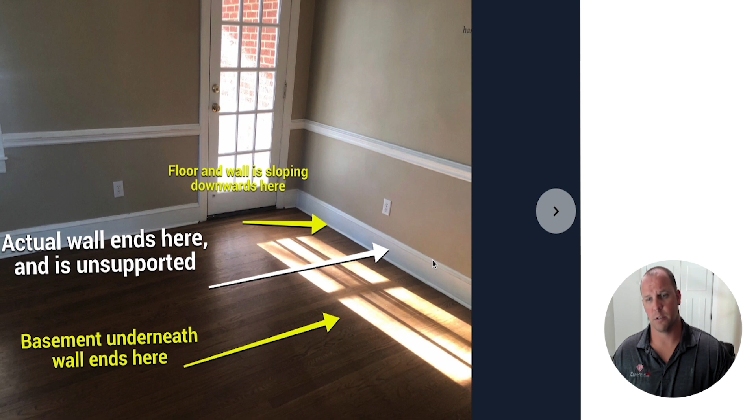So just going to walk through some of these photos so y'all can see it. Our system designer made some notations. Floor and wall is sloping downwards here. The actual wall ends here and is unsupported. The basement wall has maybe a 2-foot gap from where it ends underneath, which would explain a lot of that unsupported area.

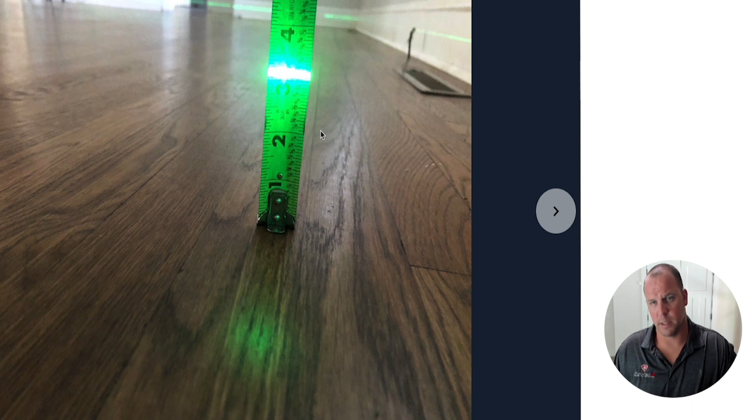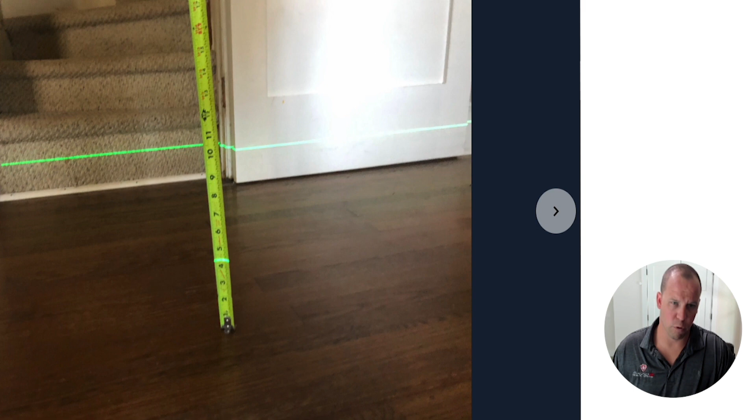You can actually see it in this picture, kind of hard to tell, but with that reflection you can see it a little bit. Here our system designer is setting up his laser. You can see roughly 2 to 3 inches there, or taking a picture, just about 3 1/4 inches. Throughout the room, here we're at about 4 1/2, 4 1/2 again, about 5 1/4, 5 1/2, 4 1/4. So we utilize lasers to tell what the floor is doing. Wow, that's almost 6 inches.

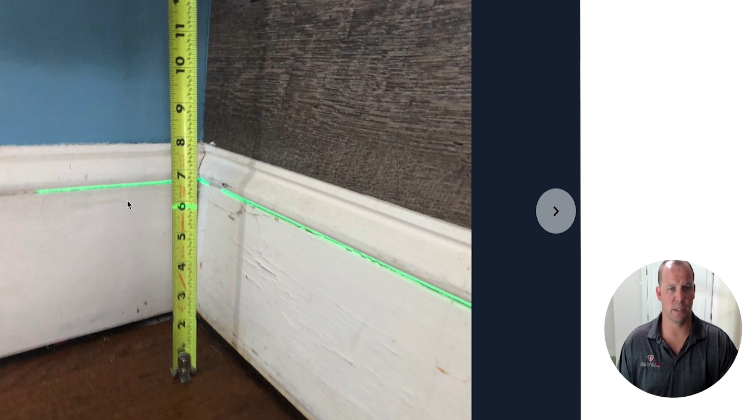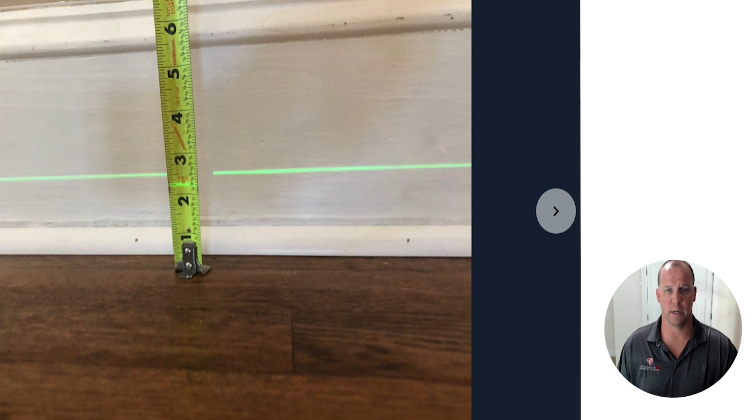So this is a good representation of how we inspect homes and the level of detail that we go to, and we want to make sure homeowners see this as well. We want full transparency, and at the end of the day we'll do as much or as little as they're looking to do.

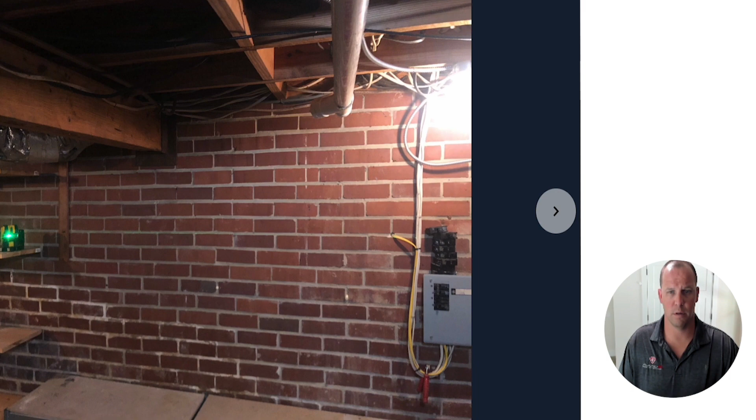Get down in the basement. Looks actually a pretty clean basement from what I can tell. Setting up the laser here. You can actually see a little bit of slight cracking right there, looks like it's dropping down. There's some more cracking, I believe, here if you follow that line.

And these are all just signs of settlement. Some people may say, well, all houses are going to settle, and that is the case most of the time. But the problem is when it's differential settlement—that's when it really becomes a problem.

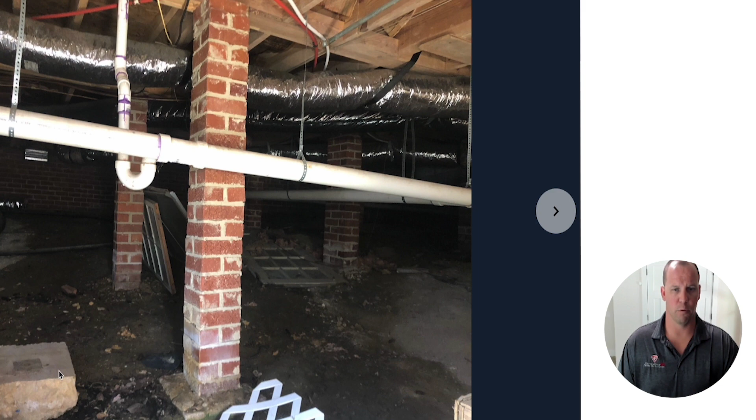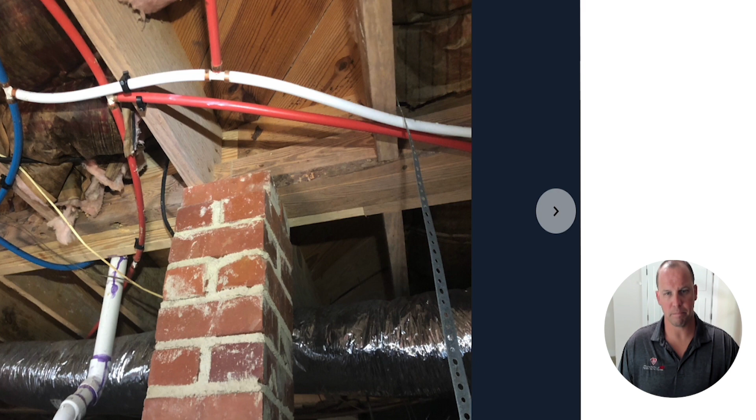You can see here a lot of room in this crawl space, but you can see all the water flowing down through here. Water and crawl spaces, if you've watched any of our videos, they do not mix. Soil saturated, no moisture barrier, debris in the crawl space.

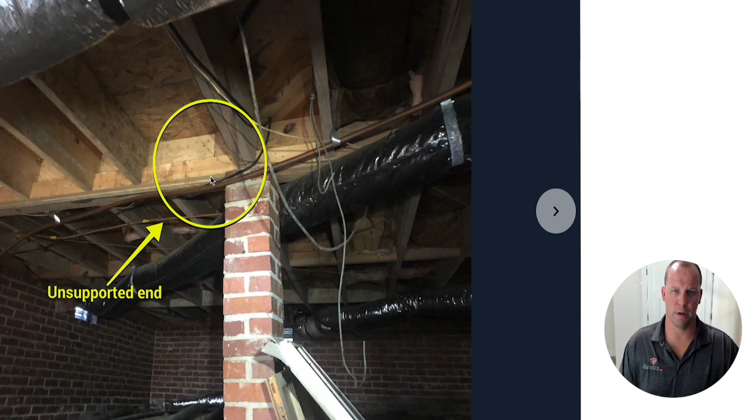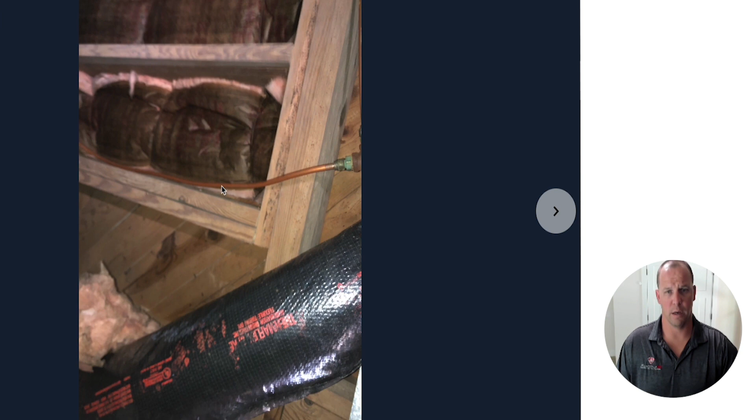You can see this girder is not supported. That pier should actually be moved over to right there. So basically just a lot of notations here, we'll kind of skim through. The insulation's installed upside down—that paper backing should be the other way.

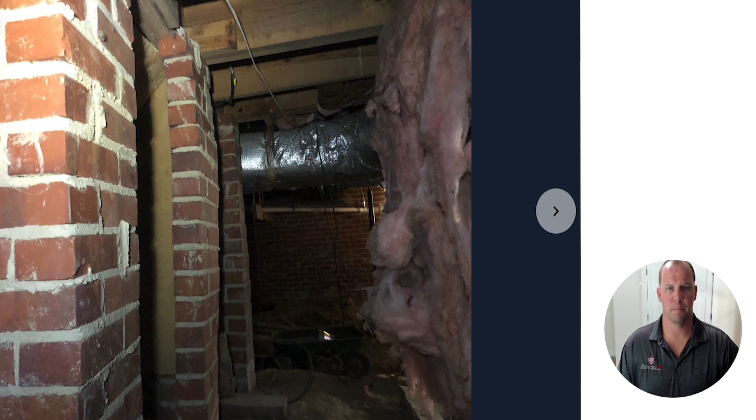This is a really good picture to see the color differences of what's wet and what's not. You can see how close the footing of this pier is to this drop off here, so he's calling that out.

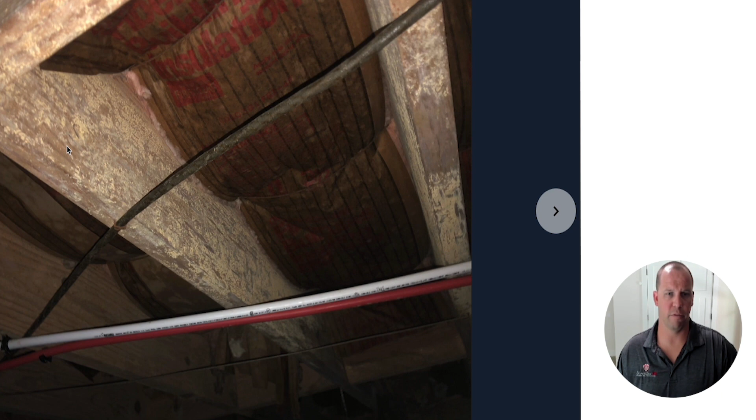Again, insulation upside down, and you can see mold and fungal growth. This isn't the most severe case I've seen, but it's definitely more than your average mold, which was a concern of theirs—one thing they wanted us to take care of for them.

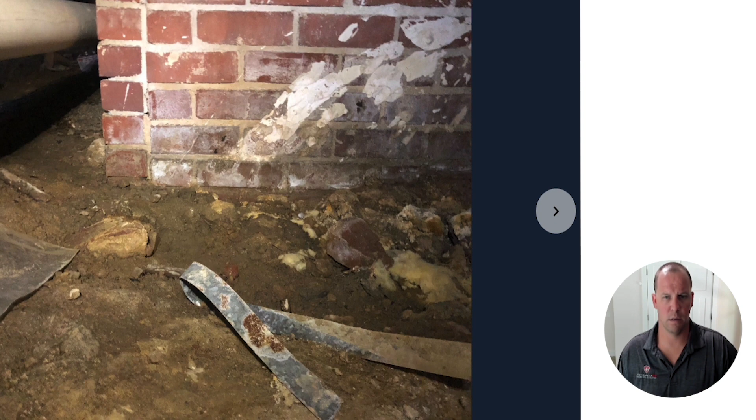So we'll just browse through these photos here. You can kind of see, so water's getting in—obviously you can see the water line that we're calling out in this picture.

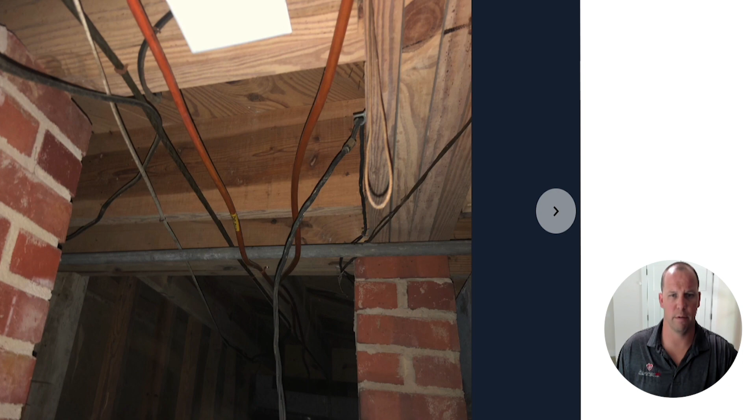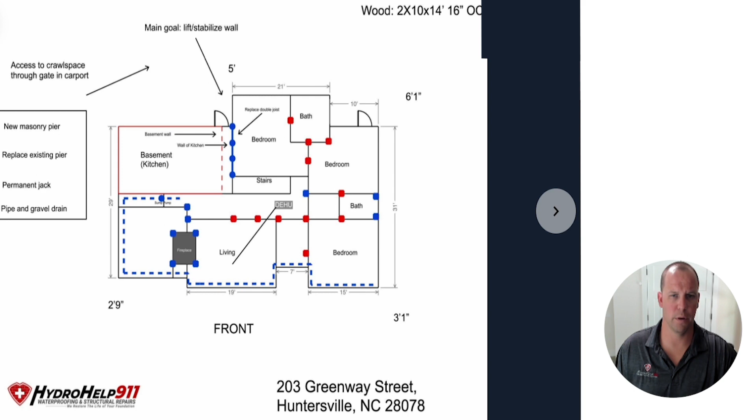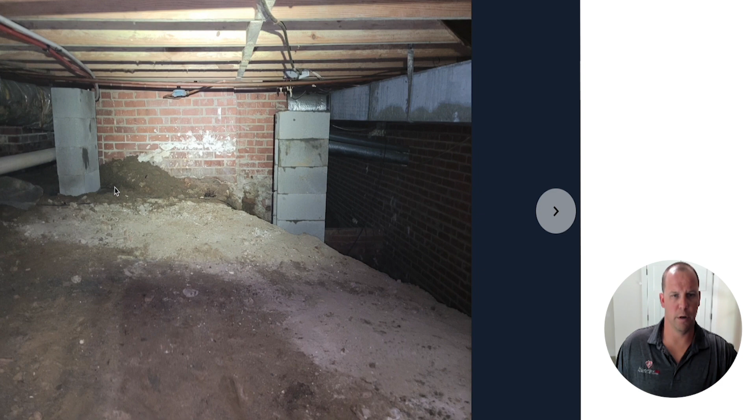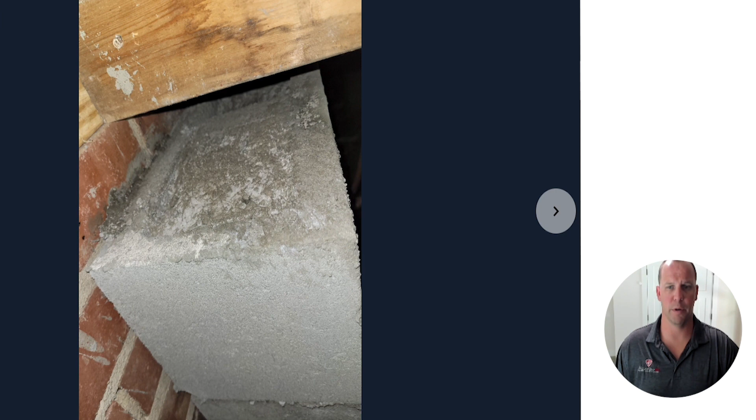So here's a drawing that we put together. We do that on all projects. You can see here we're starting our work, building some piers—we've got the footings poured, we're going to build them. We make sure that if they're a certain height we fill those piers with concrete. That's per North Carolina building code, and South Carolina also requires it.

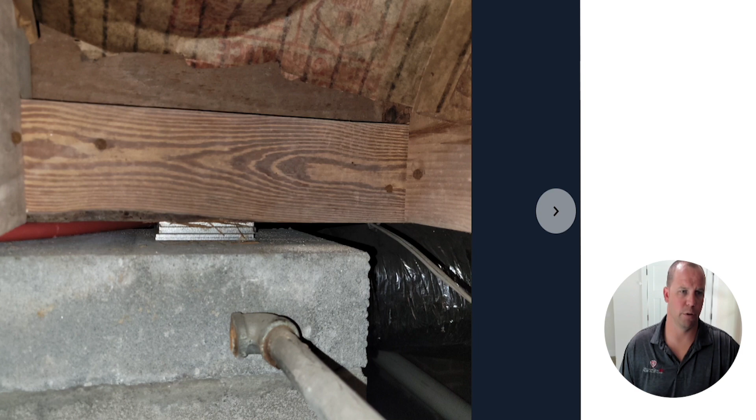Here's our I-beams with our jacks, making sure that we attach the jacks to the I-beam—that's an important part most people forget. Metal shims, you can see we're using metal shims, that's important. Here's our discharge line, looks like we installed a sump pump, and here's our drainage system to take care of that standing water. Here we are starting the encapsulation process.